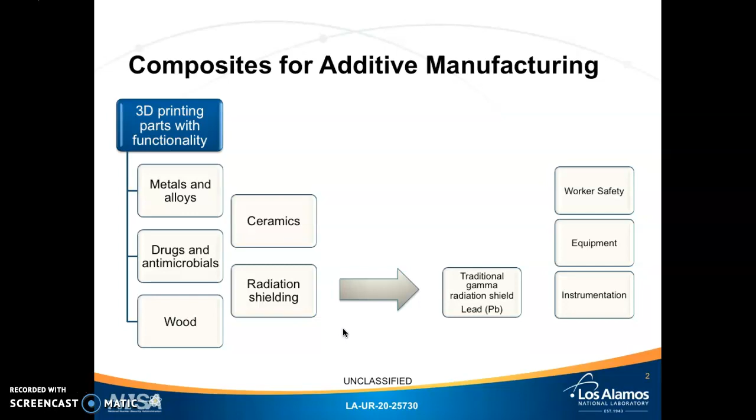As an initial step towards developing a new material for additive manufacturing, I wanted to pursue radiation shielding, specifically gamma radiation, because current technologies in both the commercial and research spaces are severely lacking with regards to feasible and accessible radiation attenuating 3D printing filaments. Traditionally, shielding gamma radiation has been performed using lead. However, because of its serious deleterious health effects, we are trying to move towards other materials. It should be noted that if we can successfully fabricate a radiation shielding filament, then this has the immediate scientific and tangible benefits for ensuring worker safety and equipment and instrumentation function.

Within the realm of additive manufacturing, the most common technique is fused filament fabrication, or FFF or 3F, whereby a filament is heated past its melting point or glass transition temperature and structured layer by layer into a full part. On the right is a photo of the 3D printer we used, which employs 3F.

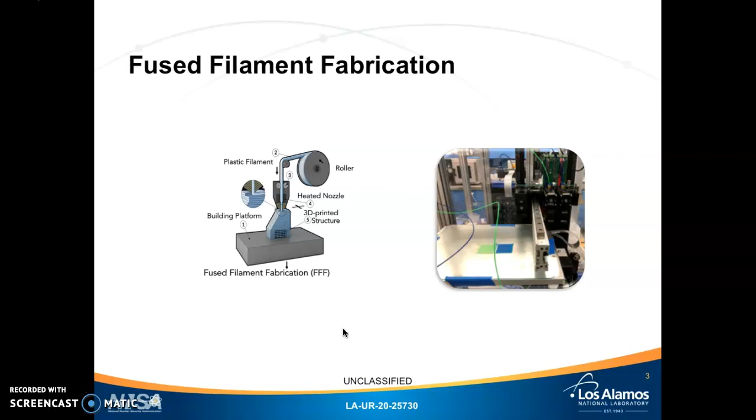My goal in this project is to first develop a high weight % loaded polymer composite that can perform as a chemical resistant radiation shield. This will be performed by using a base polymer, ABS, a terpolymer standing for acrylonitrile butadiene styrene, a common 3D printing polymer, and incorporating PVDF, polyvinylidene fluoride, a polymer that can better withstand organic solvents and acids, and bismuth, a metal that can shield against gamma rays.

After this is complete, our efforts will be focused on creating homogeneous and smooth filaments that are able to be 3D printed. Once these multifunctional filaments are fabricated successfully, we will move on towards creating polymer composite filament feedstocks for other applications, thus expanding the range of possible 3D printed materials. Following the development of polymer composites, the filaments will have their material properties evaluated via thermal, mechanical, radiative, and chemical analyses.

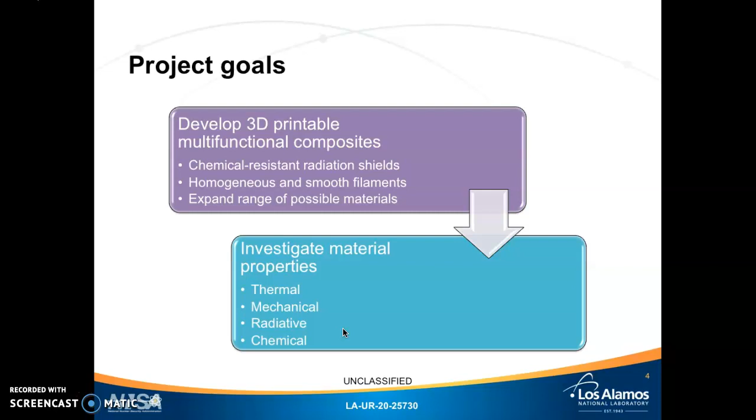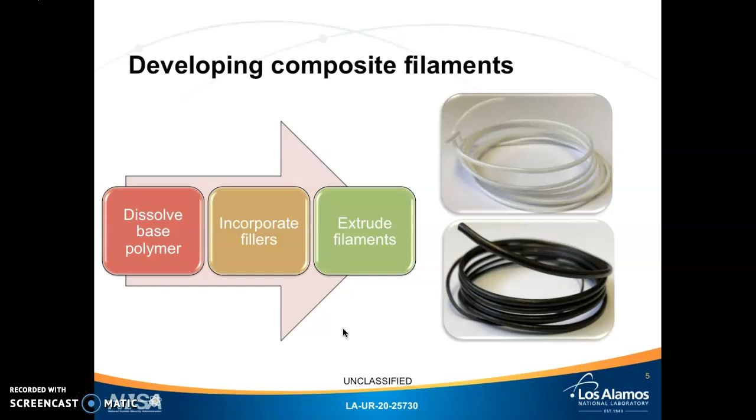The general scheme for developing composite filaments can be broken down into 3 steps. First, the base polymer must be dissolved in a suitable solvent. Then, fillers in their desired proportions can be incorporated into the polymer solution. Finally, the composite is fed into an extruder to create filaments. The image on the left is of the extrusion instrument we use, where the composite materials are fed into the hopper, which is the opening on top, and a heated metal screw pushes the material through the nozzle to create the filaments. On the right, there are examples of filaments we created using this method.

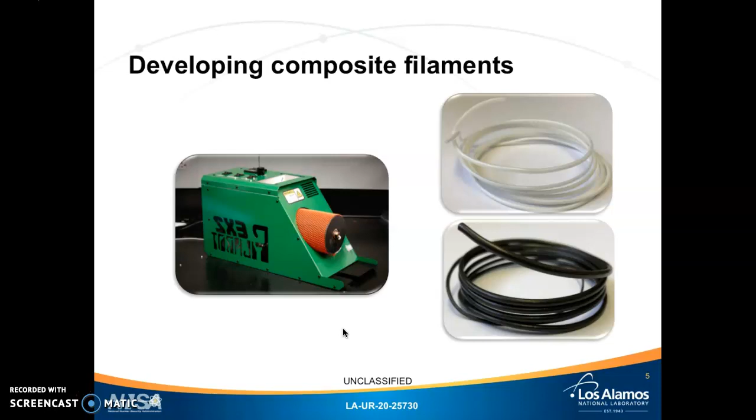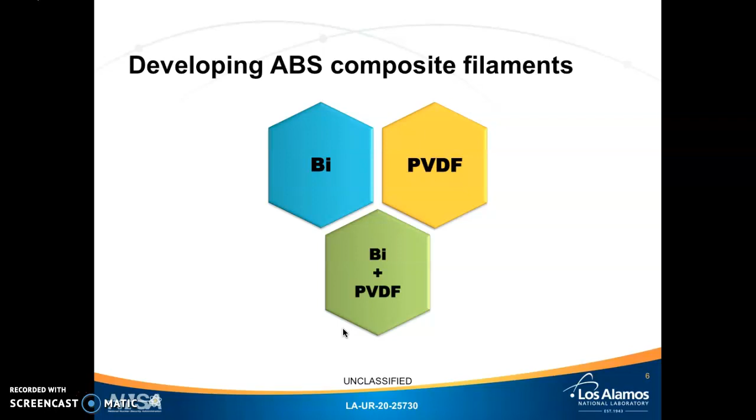The top image is of an ABS PVDF 50 by 50 weight % filament, and the bottom is ABS bismuth 50 by 50 weight % filament. These are of constant diameter and smooth enough to be fed into a 3D printer. Once we were successfully able to fabricate ABS composite filaments with PVDF and bismuth separately, all 3 were combined in different proportions to make a variety of printable composite materials.

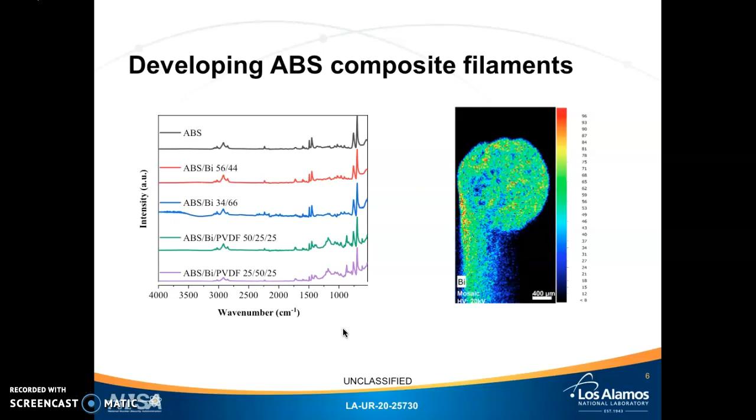The FTIR image on the left shows peaks associated with the functional groups of each organic component. Observe that the top black curve representing ABS has peaks that all the other curves exhibit, thus demonstrating that ABS did not degrade in the process. Also note that the bottom two curves have all three components, and that a peak characteristic of PVDF around 1200 wave numbers, which corresponds to a carbon-fluorine bond, is only exhibited in the filaments with PVDF. The XRF image on the right shows a color mapping of elemental bismuth in a cross-section of a filament at an angle. Using these two techniques ensures that the polymer and metal fillers have been successfully incorporated into the ABS matrix.

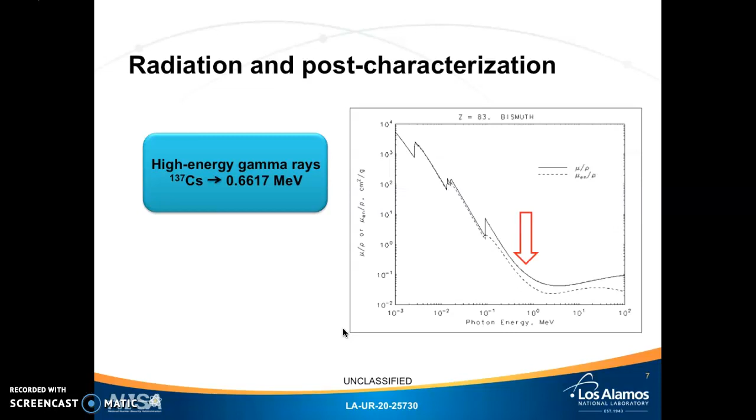Testing the radiation shielding capabilities of the composites was performed using a cesium-137 source emitting high energy gamma rays at 0.66 mega electron volts. Reviewing the radiation attenuation chart of bismuth shows our attenuation coefficient is here, and inputting this as mu along with the incident radiation I, density ρ, and thickness T of our samples allows us to estimate an attenuation of 13% when we measure an attenuation of 15%, which is in pretty good agreement.

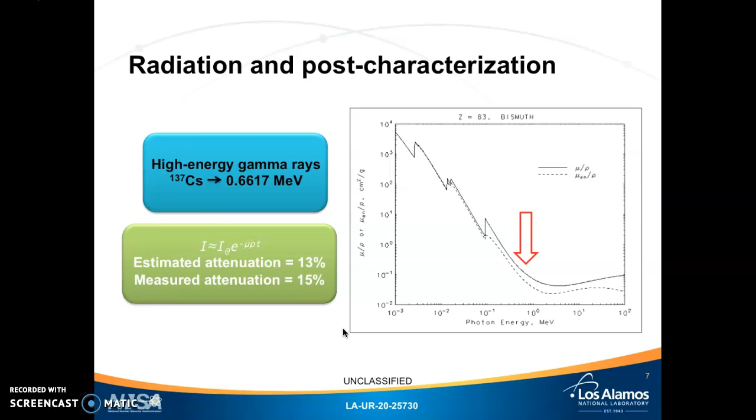Once we were able to successfully make radiation shielding filaments, we designed filaments for other applications. For more radiation-based composites, tungsten was used instead of bismuth, and for shielding neutrons, filaments with polyethylene and boron were used. For medically based composites, the biocompatible polyethylene glycol was incorporated along with the antimicrobial ceramics zinc oxide and titanium dioxide into a PLA polymer network.

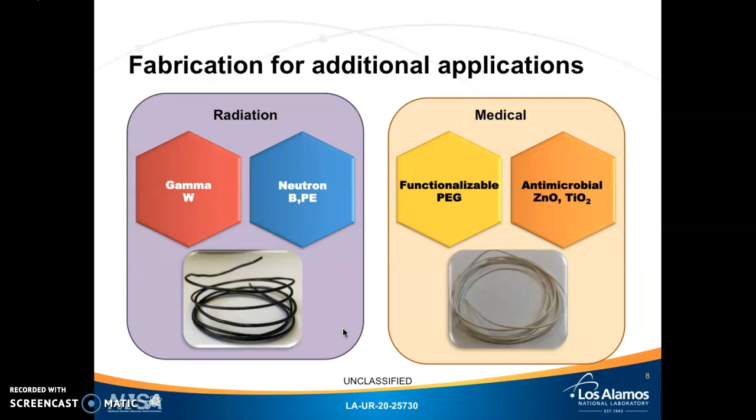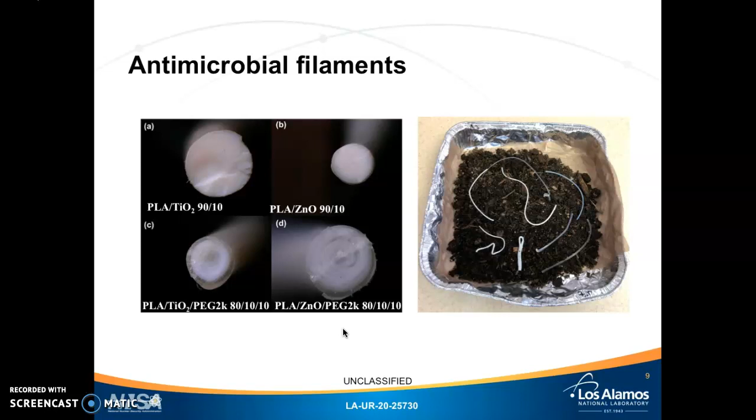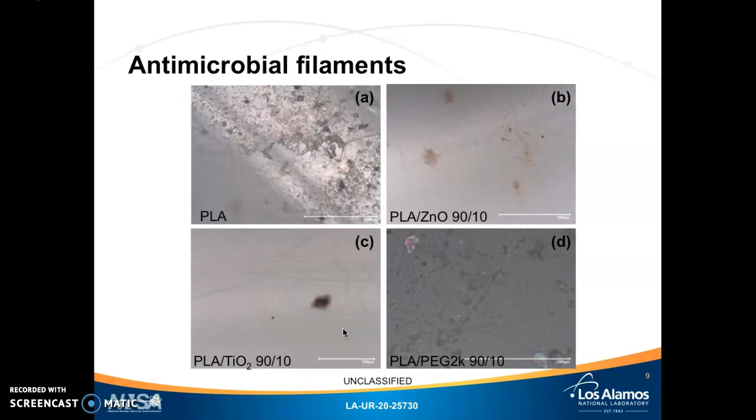The images on the left are cross-sections of the multifunctional antimicrobial filaments. We observe an outer crust developing, which becomes more pronounced when PEG is added, along with some concentric patterning within the filaments. This work is currently ongoing, and further developments will yield insight into this phenomenon. To test the antimicrobial activity of the filaments, we placed and covered the specimen in soil for a prolonged period of time at constant humidity and temperature. Some results from this experiment show that while various microorganisms can tear and alter the PLA filaments, they are less successful at thriving on the filaments with ceramic fillers.